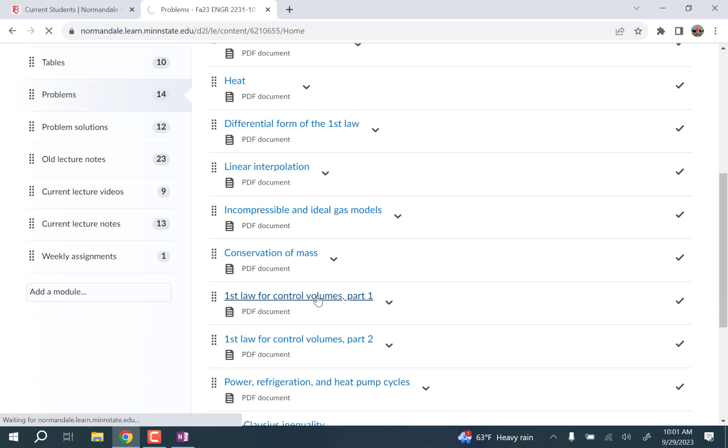Okay, so you have a nozzle. It gives a pressure at the inlet and a temperature at the inlet, and it's steam. So if you have a temperature and a pressure, and you're assuming ideal gas, you can use the ideal gas law. So that's one thing that pops into your head. And otherwise, we have tables for water too, so you can use those values to look up. You'd have to convert them, which is sort of a pain, but that's not a big problem.

And it gives us a speed coming in, and then it gives us a pressure and a speed going out. And we want to figure out the exit temperature. We're ignoring any height differences. Okay, well, let's just start going through this equation.

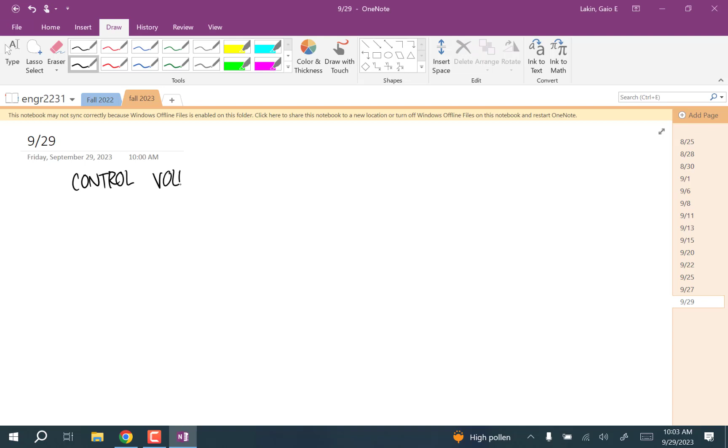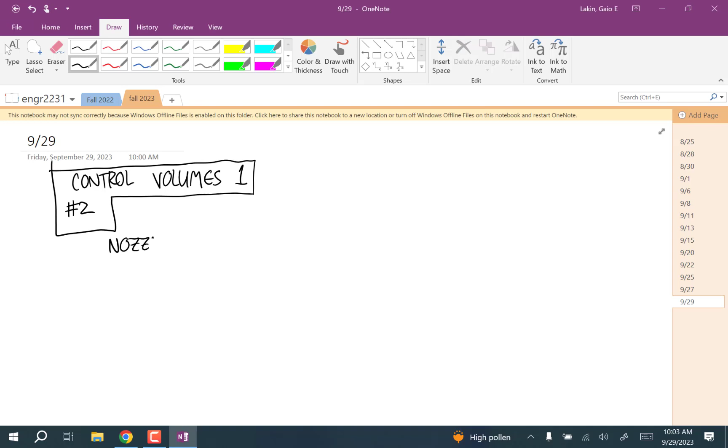So this is control volumes, number 2, and it's a nozzle. Which means that intuitively what we're doing is kind of exchanging a difference in enthalpies for a difference in speeds.

I'm going to start with the full equation. So dE/dt for the control volume is equal to Q dot minus W dot for the control volume, plus... okay, did it say steady state anywhere? Hopefully, yes, steady state operation. So I'm going to just write this right from the start as m dot. This is going to be equal to 0 too.

So m dot times enthalpy at the inlet plus the speed at the inlet squared over 2 plus gz at the inlet, minus m dot times the quantity h at the exit plus speed at the exit squared over 2 plus gz at the exit.

It said that it was well insulated, so like you're always going to do every time you use this equation, you're going to look for the stuff that cancels out. This cancels, this goes away. And it says ignore potential energy effects, so those two cancel. And we're down to 1, 2, 3, 4, 5, 6 variables.

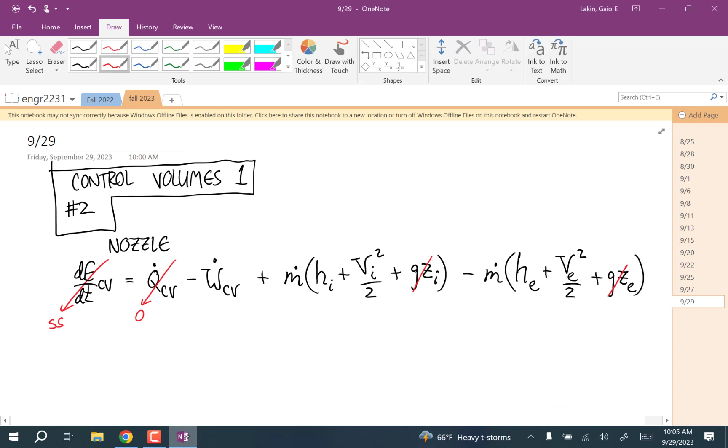Okay, well, what do we know? We know the pressure and the temperature, so that is enough for us to look up. Oh, and we know the speed. Okay, so I'm going to start just writing what we know. This is given. This we can look up in a table.

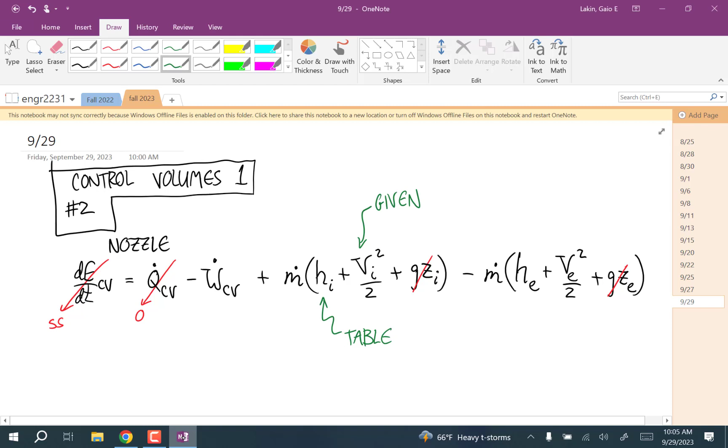Okay, and what do we know at the exit? Velocity exit, yep, and pressure. So this is given.

Does it say anything about the state? We're trying to find the temperature. It doesn't say anything about the state, so as far as we know, it still could be superheated vapor, and then we don't have enough information.

Well-insulated nozzle, okay, this is a nozzle. It's just a rigid thing, there's no expansion or anything. There's no electrical work coming in or anything like that, so this goes away.

All right, so let's simplify this. Since everything's gone away except stuff multiplied by m dot, we can cancel the two m dots. I mean, basically what we're doing is dividing both sides by m dot. And what we're left with is HE plus VE squared over 2 is equal to HI plus VI squared over 2.

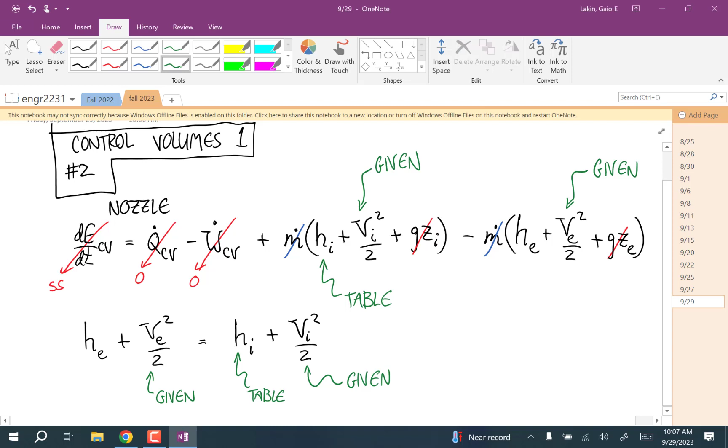This is given, this is given, this is in a table, and that lets us calculate this. And then once you know H, given that you know the pressure, you can do a reverse lookup on the temperature in the table.

So now at the exit, you know the pressure and you know the specific enthalpy, and you can do a reverse lookup to see what the temperature is, in the table.

Okay? Does that help? Okay. So I would have done it except with all the unit conversion and stuff, I didn't feel like it. Okay, but that's how you do it. Make us struggle a little bit, do it ourselves. Yeah, right.

Any other questions about homework? So number 4 is sort of like this compared to number 1. Okay, well, the fact that it says refrigerant 134A, and that's one of the small number of things that we have property tables for, almost 100% tells us that we're going to look that up in a table. So just keep that in mind. That just tells you, like, look for what properties we have. Do we have enough information here or here to look stuff up?

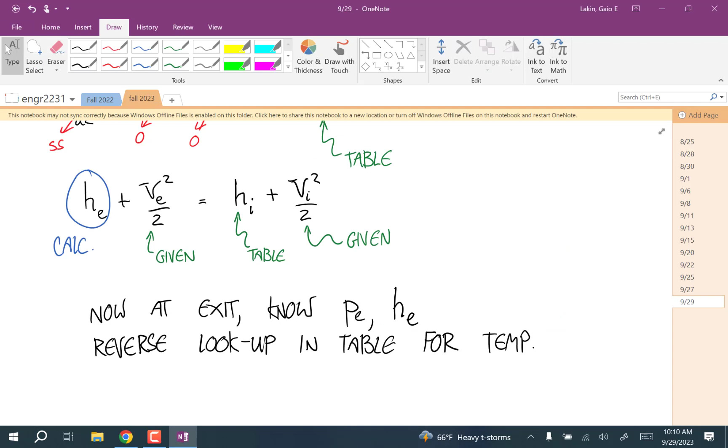Okay, and it said it was steady state, right? So this is going to be 0 because it's steady state.

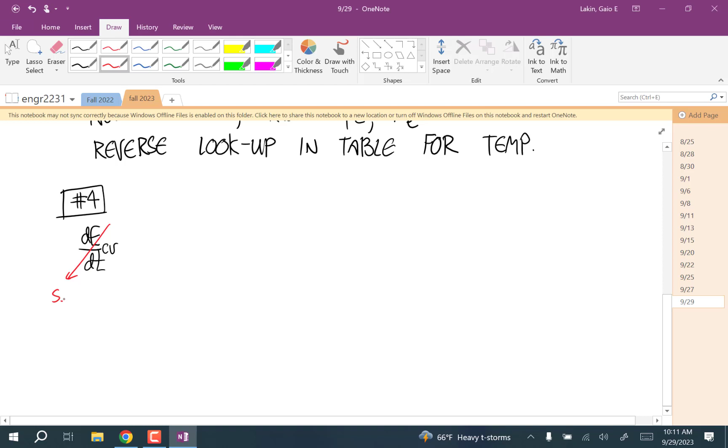That's equal to Q dot minus W dot plus M dot times the quantity HI plus VI squared over 2 plus GZI minus M dot times the quantity HE plus VE squared over 2 plus GZE.

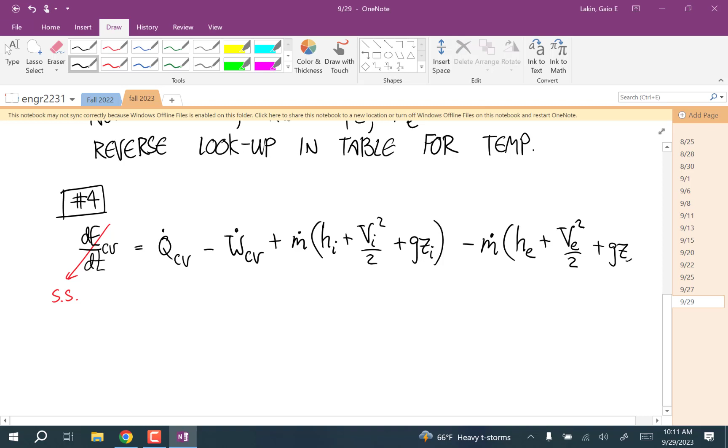And it's insulated and it's a rigid thing, so this goes away, this goes away. We're ignoring potential energy, I think. Yeah, ignoring potential energy. And it says that the velocity is negligible after it comes out, so we're going to treat this as 0.

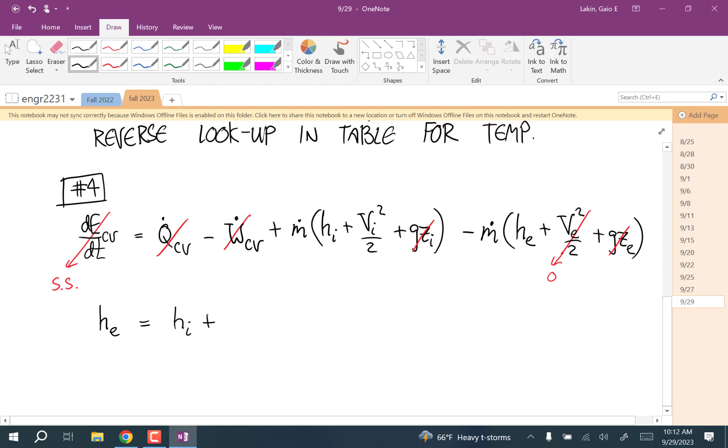So divide both sides by m dot, and we get H E is equal to HI plus VI squared over 2.

It's at the inlet, we can look it up in the table we said, and we have the speed. So this is something we can look up in the table. This is given.

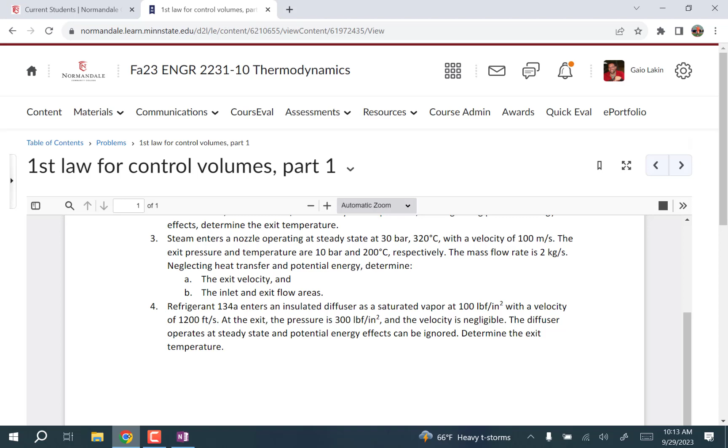That lets us calculate the enthalpy at the exit. We have the pressure. So if you calculate enthalpy at the exit, we know the pressure at the exit. And again, you're going to do sort of this reverse lookup thing where you're looking for an enthalpy and seeing what temperature that matches up with. Okay.

Any questions about that one? If I gave you, because I get up to that point where I have the enthalpy and pressure, and then I see that it's like in between a bunch of numbers, so I'd have to interpolate in too many things. Right. If I just give you them, could you just roughly set it up? You don't have to do the whole thing.

Yeah, sure. Well, hopefully the pressure that they give is one of the pressures in the table. It's between two of them. It's between two pressures. The one I got 20.69 bar. Okay, so it's like half, so it's a little bit over 2 megapascals, but.

Right, I would just use 20 for that. Okay, I think that's why. That's right. And then you can interpolate just on the temperature. That makes sense. Okay, yep. I think that's the intention of that: you're like, okay, it's there in the table, so now it becomes a one-dimensional problem. Okay, thank you.

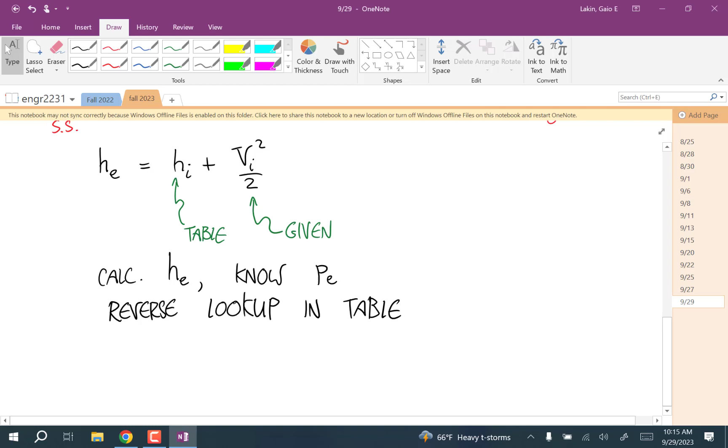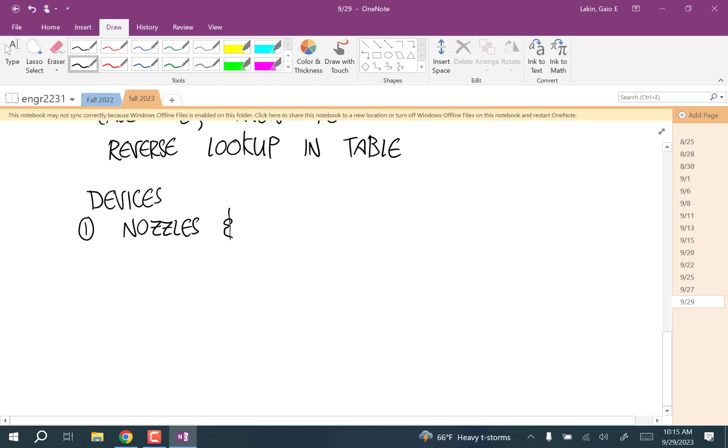Okay, so now I want to finish. We have done, okay, so for the devices that we're doing, we've done nozzles and diffusers, we've done turbines, and so the last thing we have to do is compressors and pumps.

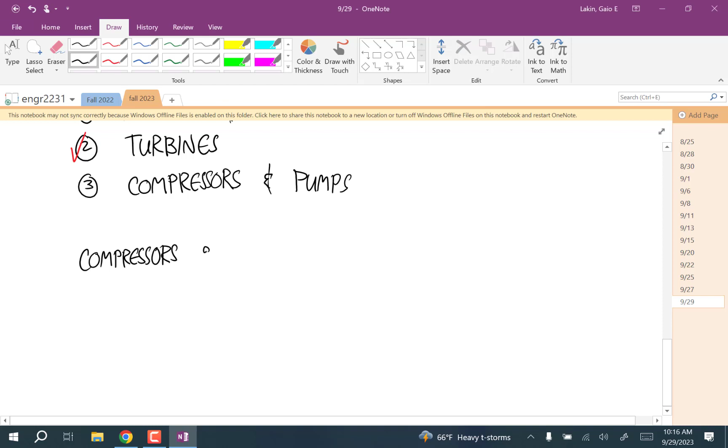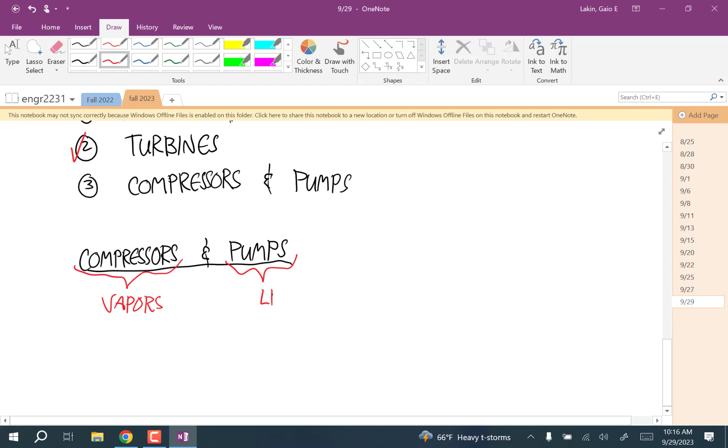Okay, well, these are very similar ideas. A compressor deals with vapors, gases, and pumps deal with liquid.

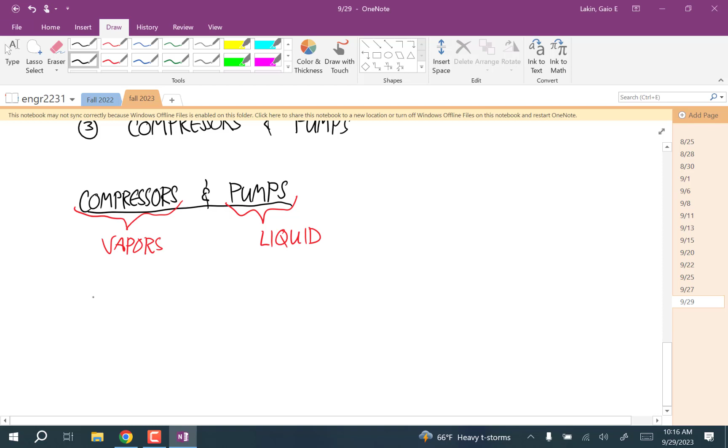And compressors, so there's two things that you can be dealing with here. First, compressors and pumps can both produce a higher exit pressure.

And then pumps can do another thing that you don't see done with compressors. Pumps can also move liquids to a greater height.

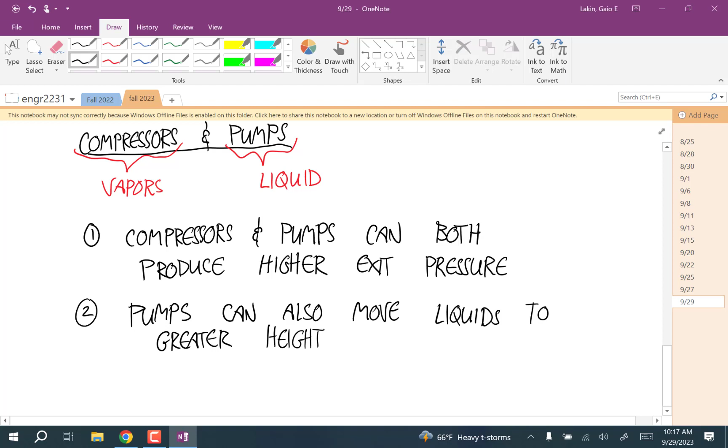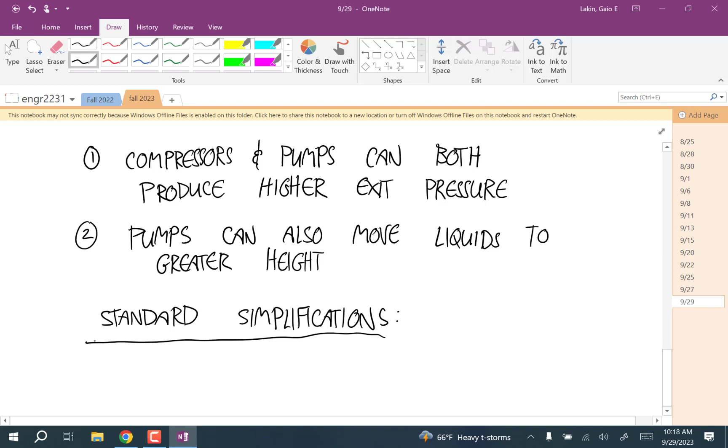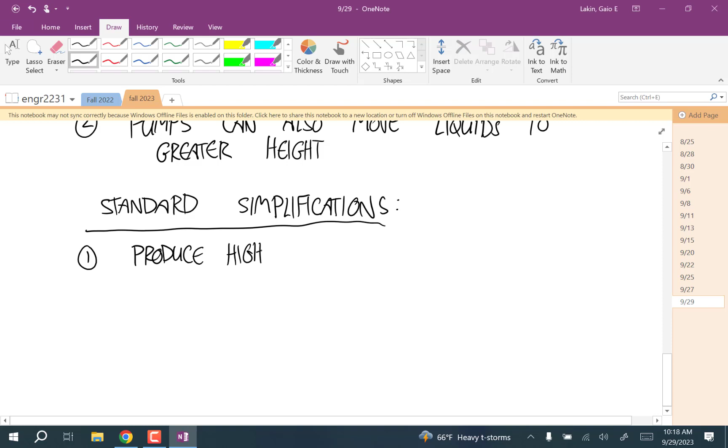Okay, so let's go through the standard simplification of compressors and pumps. Standard. Okay, so first I'm going to go, if what you're doing is increasing the pressure at the exit, producing a higher pressure than at the inlet, I mean at the exit, then at the inlet, so here are the assumptions that you're generally going to make.

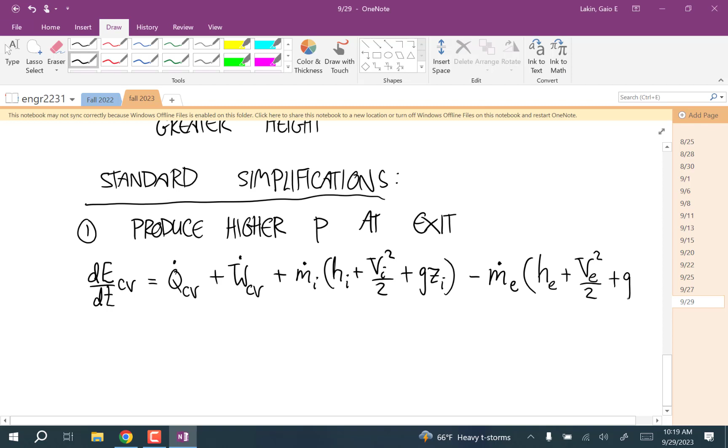dE dt is equal to Q dot plus W dot plus Mi dot times the quantity Hi plus Vi squared over 2 plus GZI minus Me dot times the quantity He plus Ve squared over 2 plus GZE. Okay, so that's the starting point.

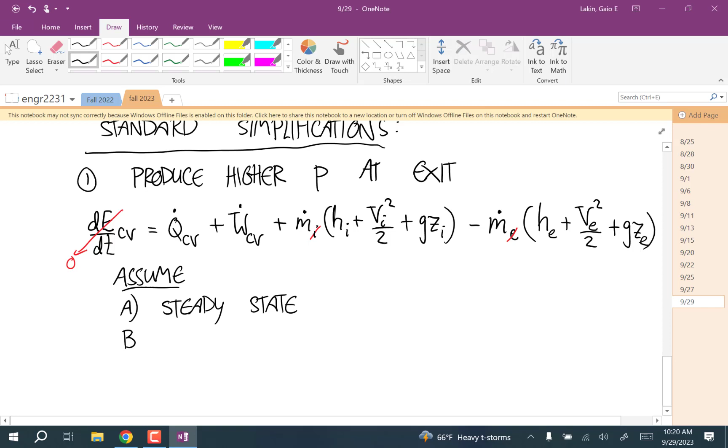And we're going to assume first, steady state, and so that makes this go to 0. The I and the E go away, and we just have the one M dot. We're going to assume that there's no significant heat transfer.

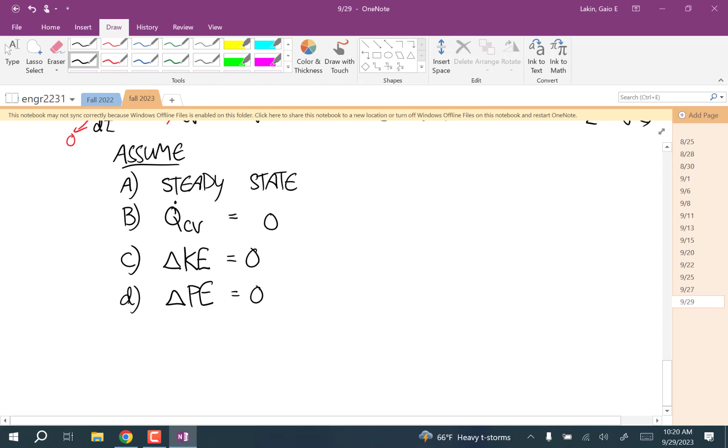We're generally not concerned with speed, so we're going to assume that the change in kinetic energy is 0. So that goes away, these two cancel. And since the first one we're doing here is just producing a higher pressure at the exit, we're not concerned about the height, okay? So the change in potential energy, we're gonna set to 0. So these go away.

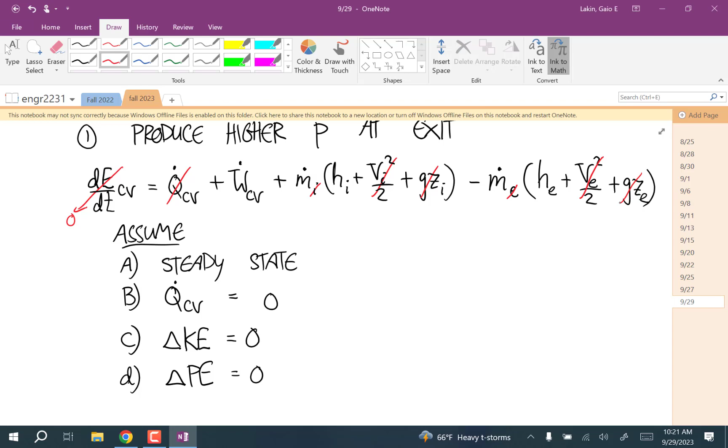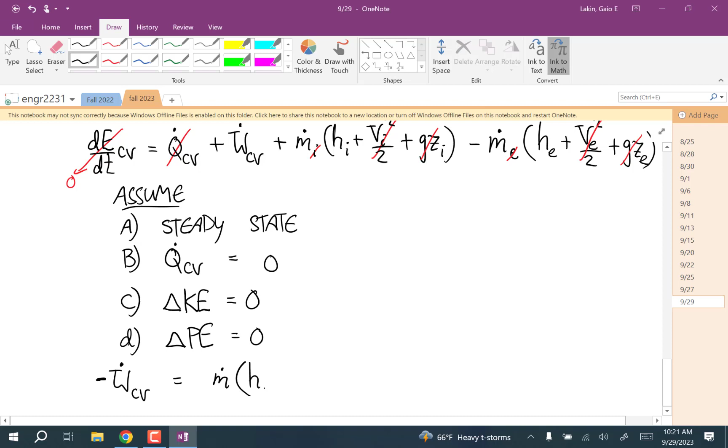And what you're left with is exchanging work for enthalpy. So this simplified model says the rate of work is equal to, and actually let me write this in a different form. You can keep it over here: negative work CV, okay? So I'm gonna move the W dot over to the left side of the equation, and that's equal to M dot times the quantity H at the inlet minus H at the exit.

Notice that this is fundamentally the same equation as the turbine. But a pump is very different from a turbine. So what's going on in this that's different from a turbine? Enthalpy instead of kinetic energy.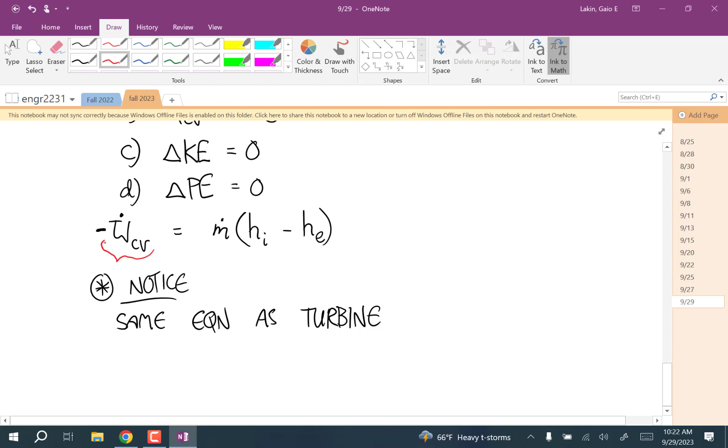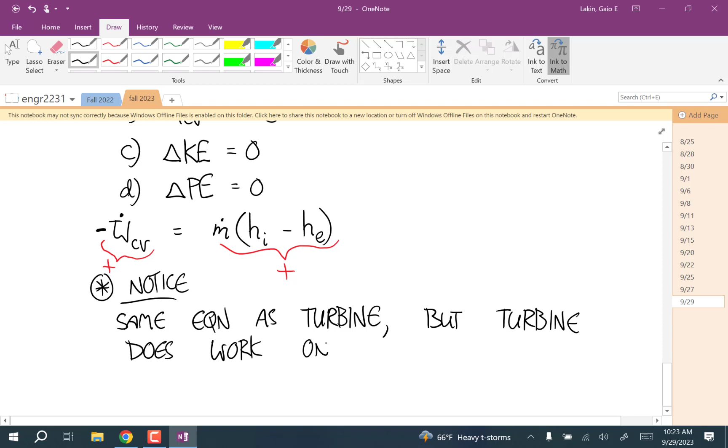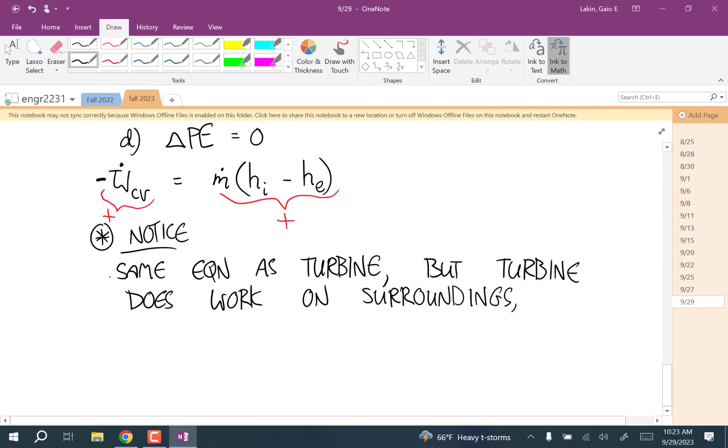I think actually, yeah. So both of these two sides are positive, so it's the same, it's the same quantities in there, but a turbine does work on the surroundings, whereas a pump inputs work from the surroundings. It can either be mechanical work, you can make mechanical pumps, or it can be electrical work.

So a compressor or a pump inputs work from the surroundings.

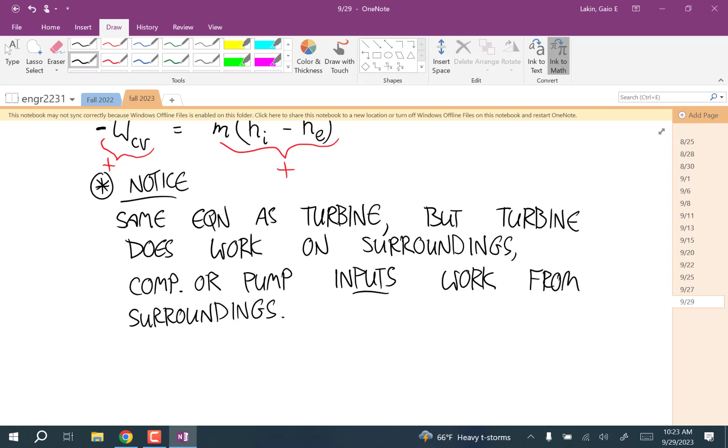Okay. Let's see if I have a problem for that. Yeah.

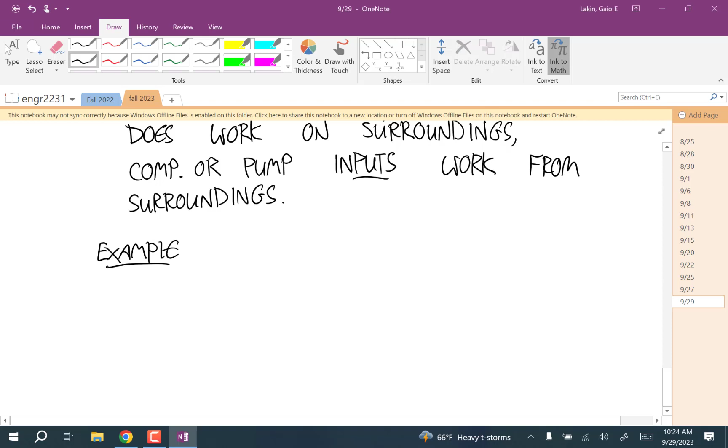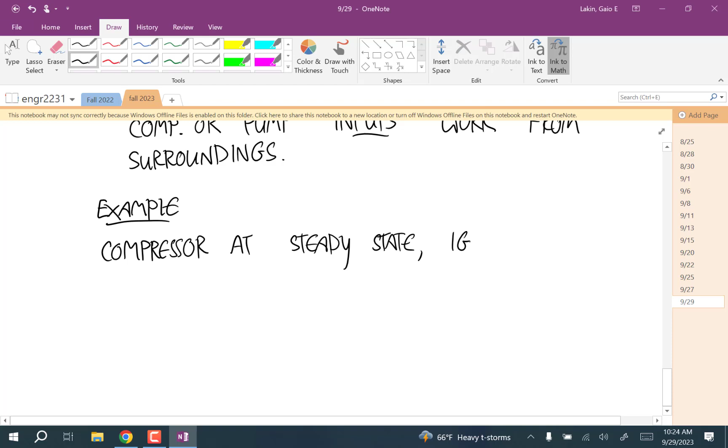Okay, so let's say you have a compressor at steady state. And we're going to ignore kinetic and potential energy effects, so we're going to ignore the change in kinetic energy and the change in potential energy.

At the inlet, we're given that the pressure is 1 atmosphere. 1 atmosphere is the same as 1 bar, I believe, so 1 times 10 to the 5th pascals.

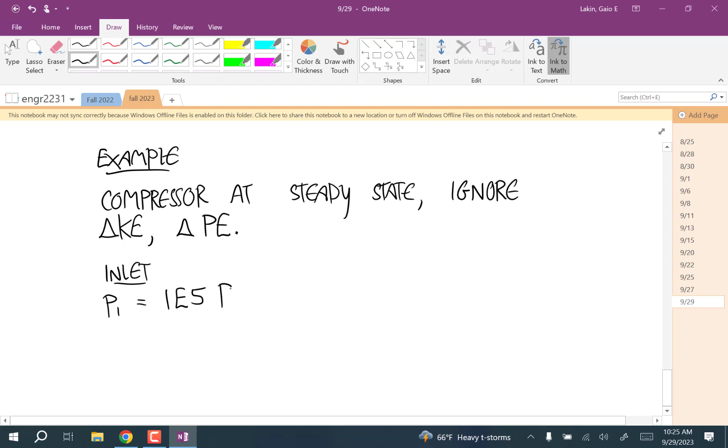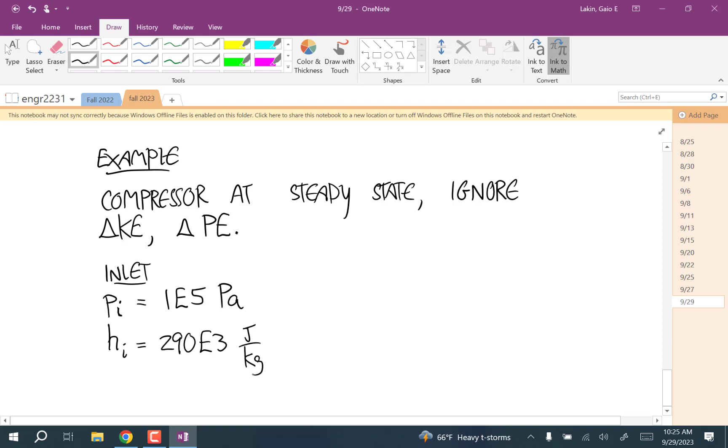And the specific enthalpy at the inlet is 290 times 10 to the 3rd joules per kilogram. And M dot, let's say this is given at the inlet, is equal to 0.1 kilograms per second.

And then at the exit, we're given that the enthalpy is 1023 times 10 to the third joules per kilogram.

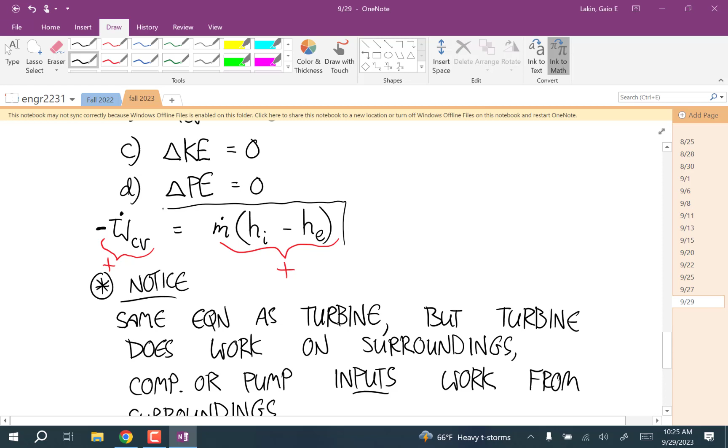And we want to know, so this is the standard simplification, but we want to know if we're given that the electrical power, because it's pretty easy to measure electrical power going into a device.

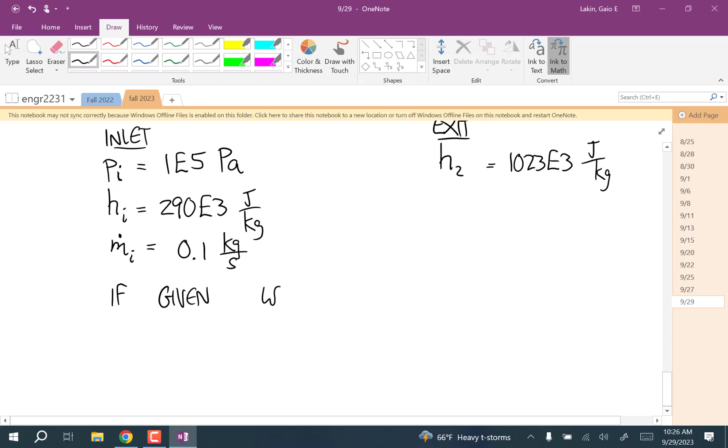If you measure that and the rate of work is 77 times 10 to the third watts going into the device, into the compressor.

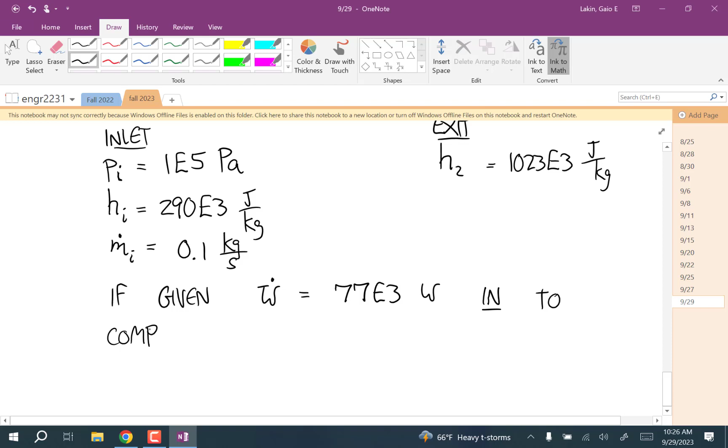Okay, well, we know we're not using this simplified form of the equation completely because it doesn't have a Q dot in it. So we're going to have to do the simplification ourselves and just base it on what they said we're assuming.

It's steady state, so I'll cancel that right now. We know we need to leave Q dot in there. The rate of work is given.

Is W dot going to be positive or negative? Positive, negative for the compressor? Yeah, so for any compressor or pump, pretty much W dot is always going to be negative. So we're going to write this as minus negative 77 times 10 to the third. Okay, you with me on that?

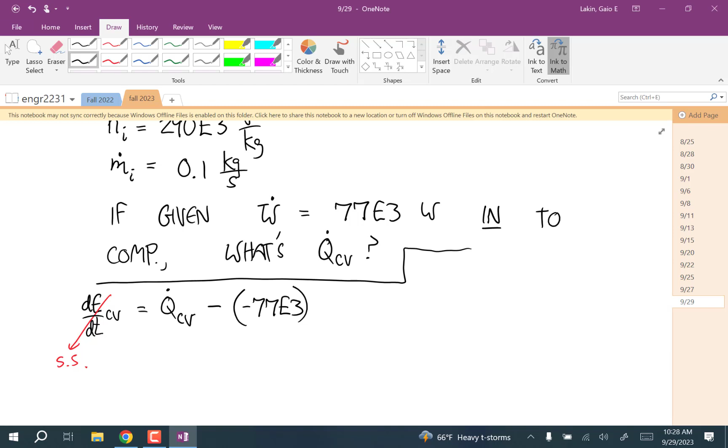And then it's steady state, so there's only one M dot. So we have plus 0.1 times the quantity, enthalpy at the inlet is 290 times 10 to the third.

Plus, you have this stuff, but we're neglecting these two contributions, so forget about that and that. And then we have minus 0.1 times the quantity, enthalpy at the exit is 1023 times 10 to the third.

These two terms go away, and you're left with an equation that you can solve.

So if you go through that calculation, you get that the rate of heat transfer in the control volume is negative 3,700 joules per second. And joules per second is watts, of course, you can write it like that.

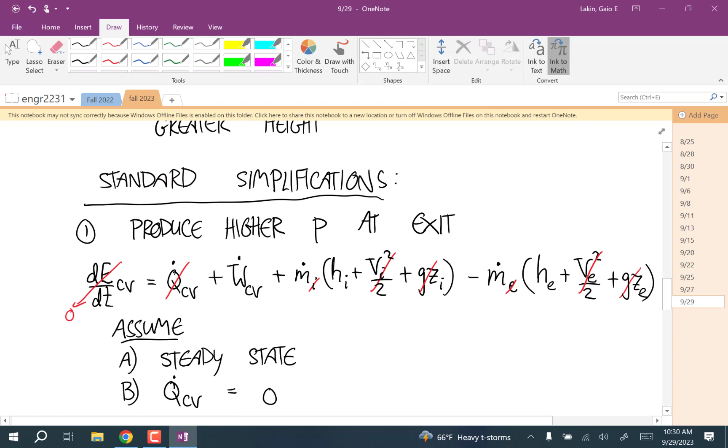Anybody have any questions about that? Okay, so this was all for the case of a pump or a compressor where you're trying to raise the pressure. If it's a pump, you do it exactly the same equation and everything.

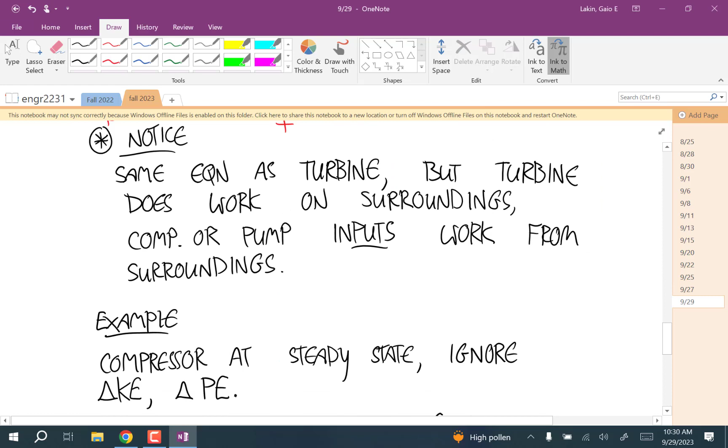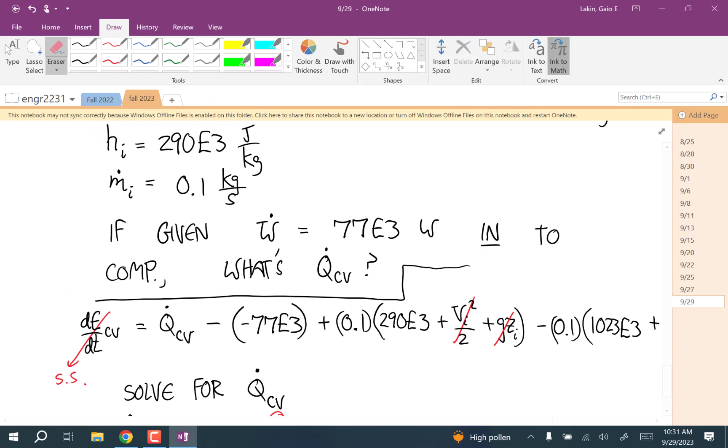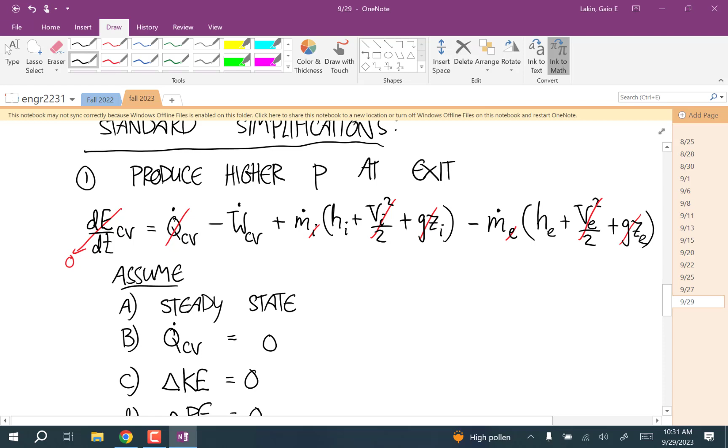No, in the... Oh, I gotcha. So instead of doing the negative and the negative, yeah, but where you wrote it out, you put plus W at the top, at the very top. Yeah, I didn't really know how to write that. No, because I was trying to make, like in this, the full dE over dt CV, the full CV equation that you wrote. Oh, I did? Oh, thank you. Yeah. Okay. Okay. Just trying to prevent... Yes, thank you, down the line. Yes, thank you.

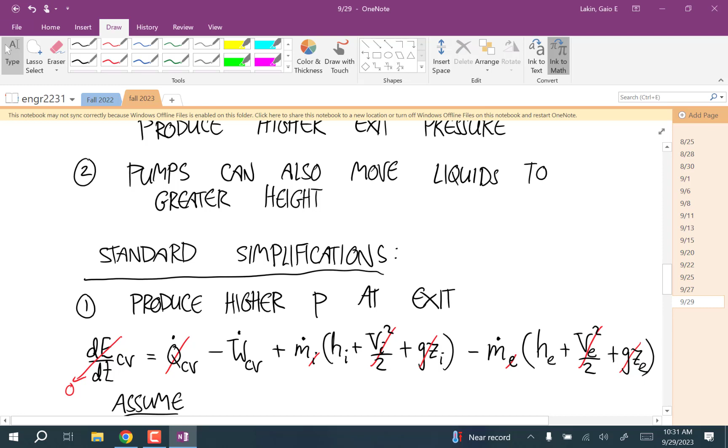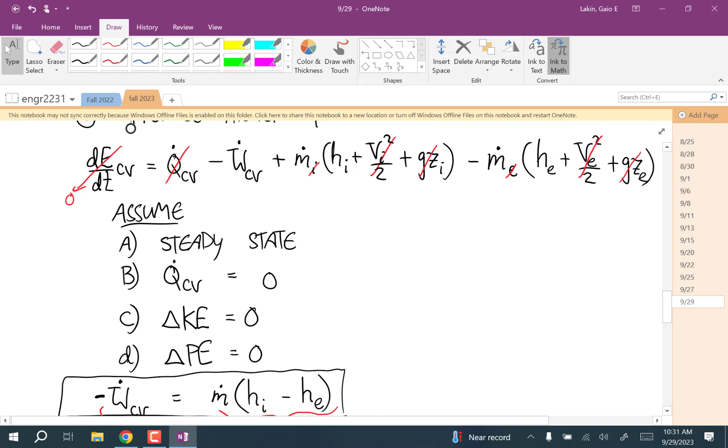Okay, so now we're going to go to the second case. Would that not make, when you do the assumptions, would that make W positive instead of the negative W, or does that assumption still say the same? Let's see, no, I just kind of glossed over it. Let's see, then oh, you're right, that it should be, well, yeah, thank you. Okay, it does, because you're definitely going to have a higher enthalpy when you have the higher pressure at the exit than you do at the inlet. So this should be HE minus HI. Yep.

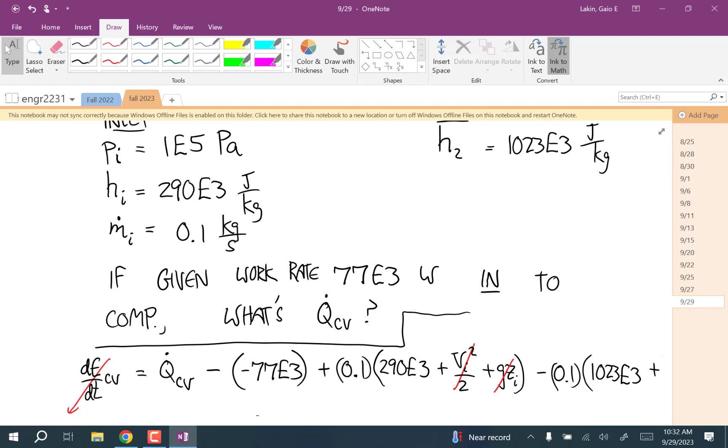Okay, so now we're going on to the case where we have a pump, so we're only dealing with liquid, and we're using it to raise the height of a liquid.

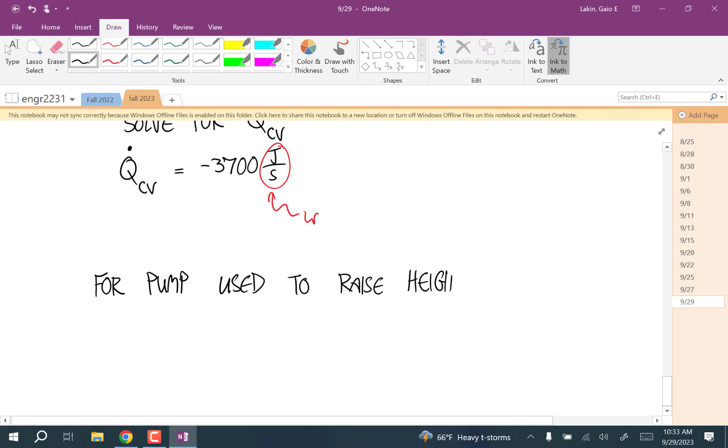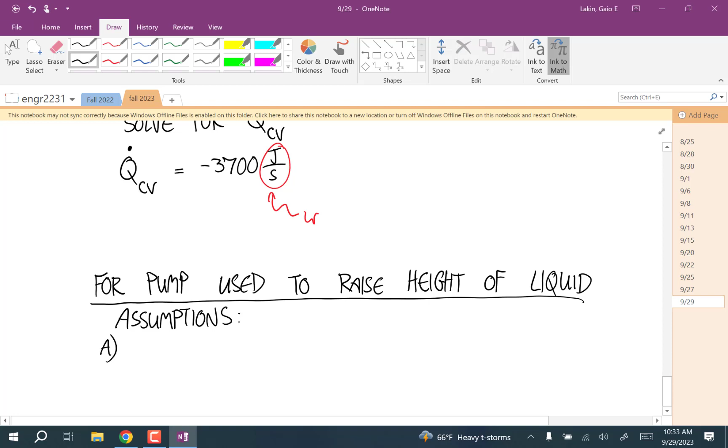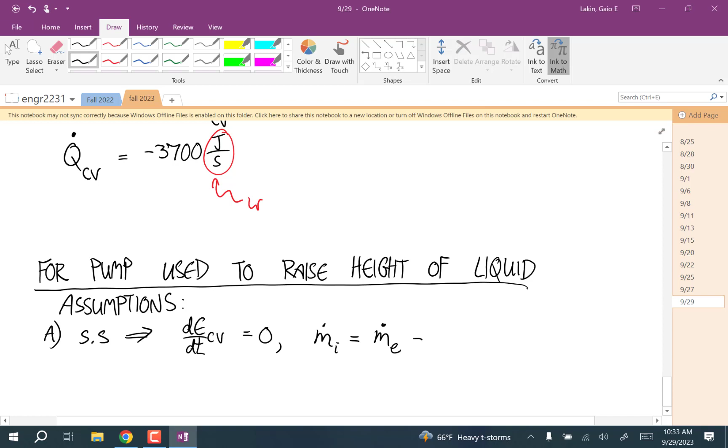The assumptions that we're going to make: first, steady state, so dE/dt is 0, and m dot i is equal to m dot e is equal to m dot. We're going to assume there's no heat transfer, so Q dot for the control volume is 0. We're still going to usually assume that there's no change in speed that makes a big difference, the kinetic energy. But now the potential energy is going to matter because we're changing the height of the liquid. So the change in kinetic energy we're going to assume is 0.

And then the last thing we're going to do is, we're going to consider our system not to be like the machinery of the pump anymore, but we're going to consider it to be kind of the two ends of the hose, if you think of something like pumping liquid out of a pool. So if you think of it that way, your system is drawing a boundary around everything, including the inlet, the entire inlet hose or pipe, and the whole exit hose or pipe.

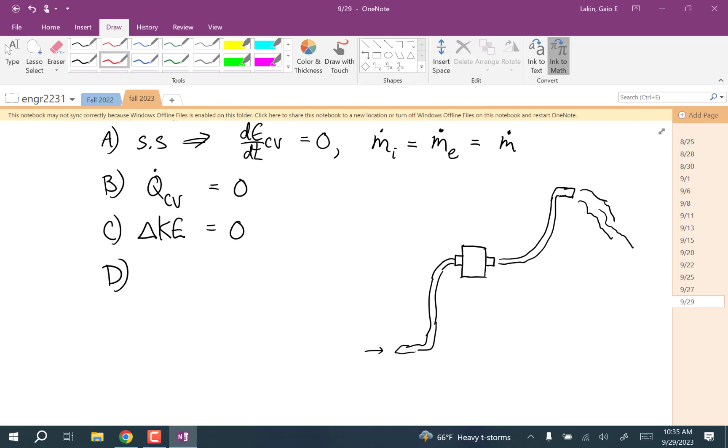What do we know about the pressures at those two? So if the pump looks like this, and you have a hose that's getting water from down here, and then it's distributing the liquid up here, and that's like some small number of feet. Our system is not going to be just the electrical device, but it's going to be this whole thing. Well, then in both cases, the pressure at the inlet and the exit is just the atmospheric pressure.

And so we're going to assume that enthalpy doesn't change.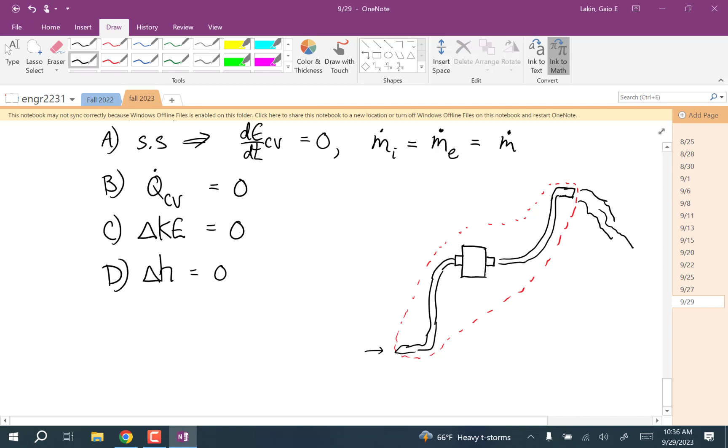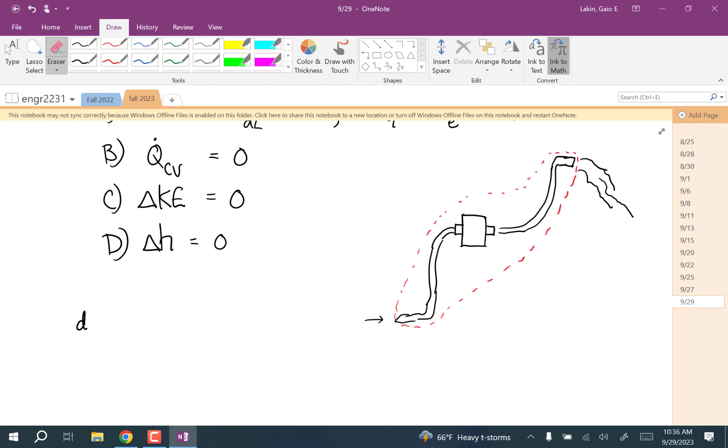Okay, so if we start with the full equation, and then minus the exit stuff, this goes away. It's just an m dot, that's all because of steady state. We're assuming that there's no heat transfer. The work is electrical work coming in. We're assuming that the two kinetic energy terms cancel out, and we assume that the enthalpy cancels out.

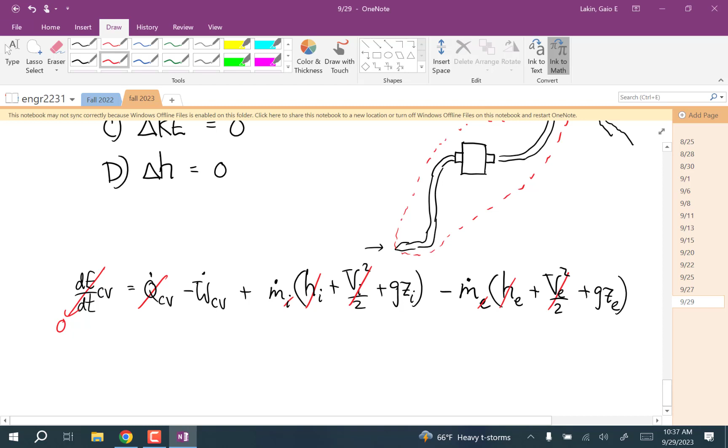This is the first one. Every other simplified equation that we've seen uses enthalpy. This is the only one that doesn't. And we get negative W dot for the control volume is equal to m dot times the quantity g z_e minus g z_i. And both of the sides of this equation are positive.

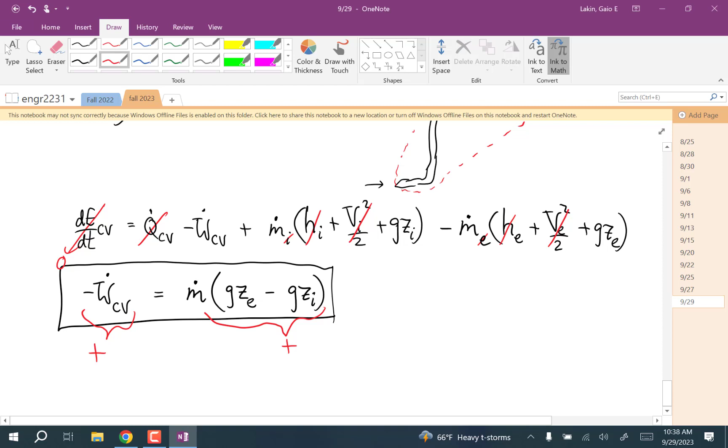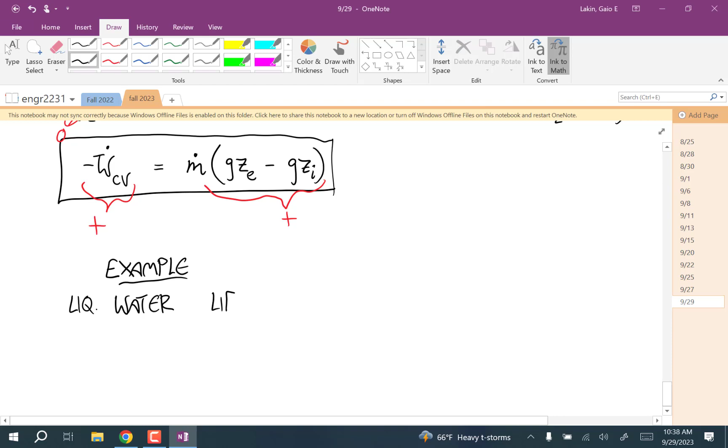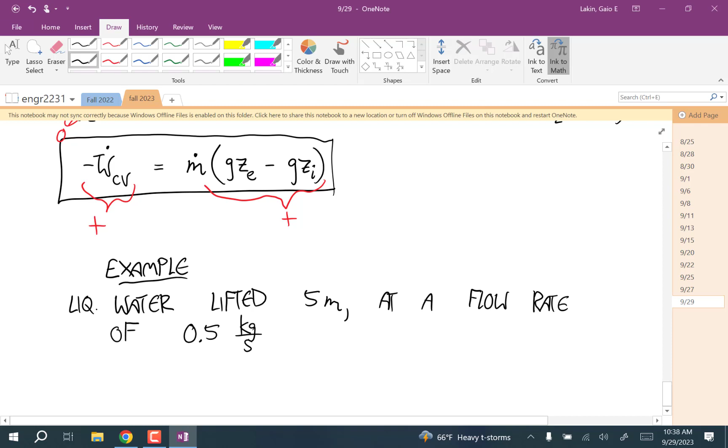Okay, so an example of this: let's say liquid water is lifted 5 meters at a flow rate of 0.5 kilograms per second. If the system is in steady state, what's the power required?

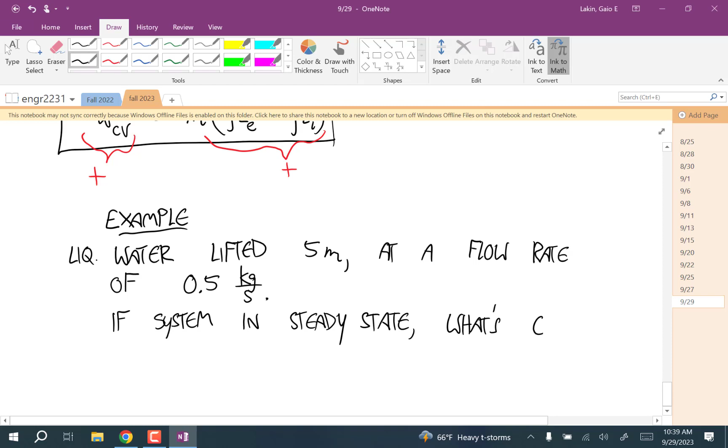Well, this is one where it doesn't tell us what stuff we can cancel. So we'll write out the full equation, we'll see what we have, and then, since you can only solve for one variable with an equation, we'll start thinking about, based on our standard assumptions, what are the things that we can probably cancel to get an answer.

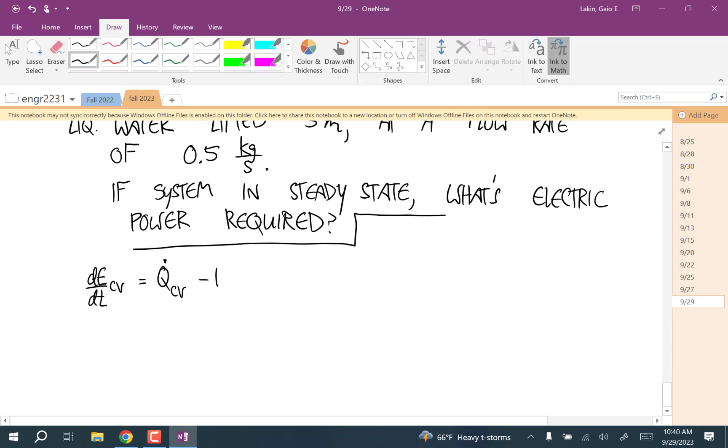So we'll start with the full equation: dE/dt is equal to Q dot for the control volume minus W dot plus, the mass flow rate is 0.5 and it's steady state, so that's the same for the inlet and the exit. We don't know anything about the pressure or the temperature or anything like that.

Well, let me just start writing stuff out. So H at the inlet, plus V_i squared over 2, plus g z_i, minus 0.5 times the quantity H_e plus V_e squared over 2 plus g z_e.

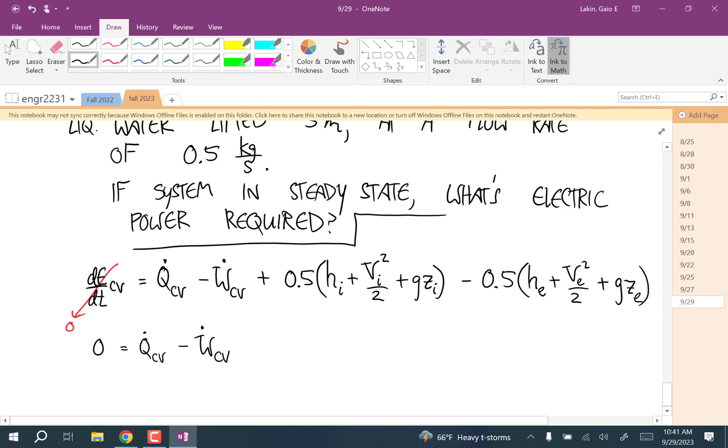Steady state, so we know we can get rid of that. We know that 0 is equal to Q dot minus W dot plus, I'm going to group these together, 0.5 times, let me make that a bracket. Okay, so we have H_i minus H_e.

Plus V_i squared over 2 minus V_e squared over 2, plus g z_i minus g z_e. Well, this one we know, right? So this is equal to, we have a higher value at the exit, so this is going to be minus 5 times 9.81. All right, are you with me on that?

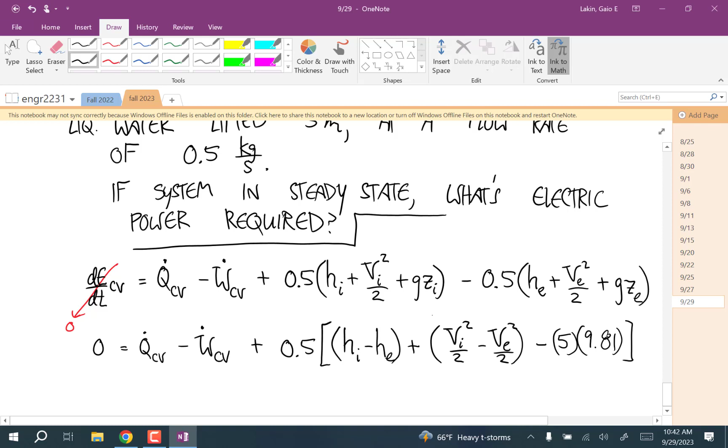We're trying to calculate this work, so now we have to think about what kind of things are reasonable to cancel. Well, in the standard simplified model, we assume that there's no heat transfer, so we'll get rid of that. We assume that there's no change in enthalpy, so get rid of that. We assume kinetic energy doesn't make a big difference, so we'll get rid of that. And now we have an equation that we can solve.

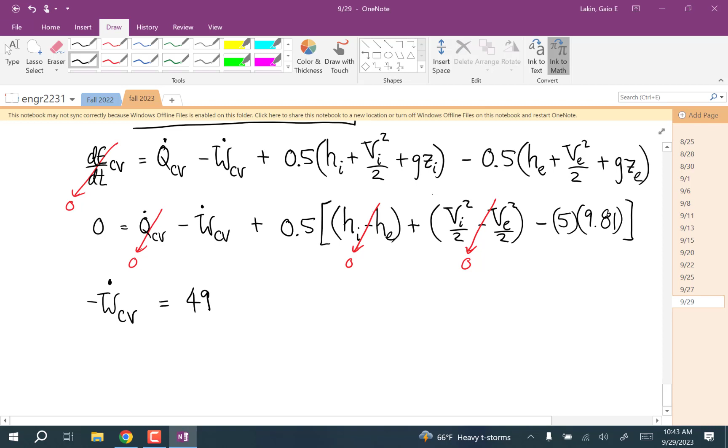Okay, so negative work is equal to positive 49.05 — whoops, I left off the 0.5, so 0.5 times positive 49.05. And so W dot is equal to negative 24.525 watts. And that negative makes sense because that's electrical work coming into the pump.

Any questions about that?

Okay, well that is it for those 5 devices, and I'm going to stop there for today. Next time we'll go through a detailed outline of all the topics that we've covered up until now and just try to refresh our memories on what equations we have, how you can work with these, how they fit together, that kind of stuff.